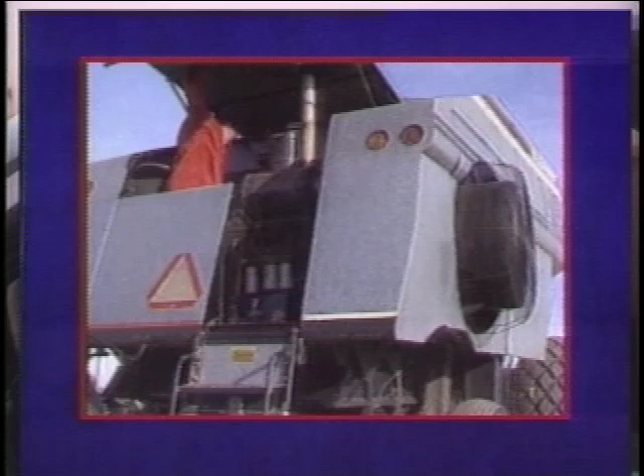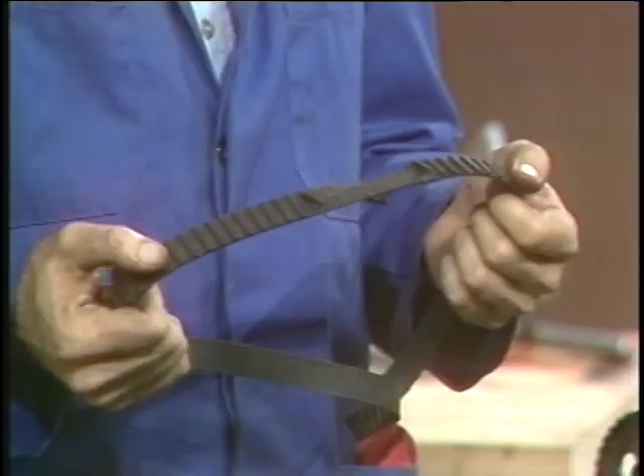On our show today, we're going to talk about timing belts. That's something I've got some experience with. This came off my car and it broke about a week ago. This is the second belt I've broken on this car, so I've got a little background knowledge on this. Cars today, there's 300 or 400 models that use timing belts instead of chains now. You find them mostly on import cars and four-cylinder American cars.

Older cars use timing chains, and we'll give you an example of those. Manufacturers suggest that you change your timing belt between 36 and 60,000 miles, depending on the maker. And it's a good idea to do that, because if you lose a timing belt at highway speed, you've got a big and expensive problem.

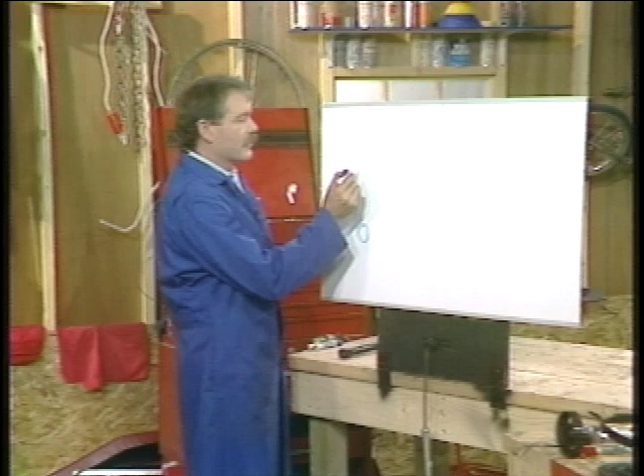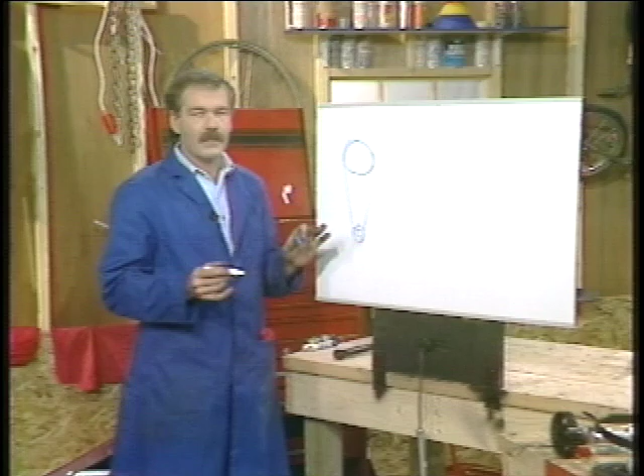Let's go to our tool illustrator and draw a picture of what we used in the old days, or the current big V8s. We'll draw the crankshaft right here in the bottom of an engine and a camshaft up here. A camshaft is the thing that runs your valves. So on the bottom of the crankshaft, we have a chain in older V8 engines that comes up and runs a camshaft gear. A camshaft is a thing that's got a bunch of little lobes on it, and I'll show you one of those in a few minutes.

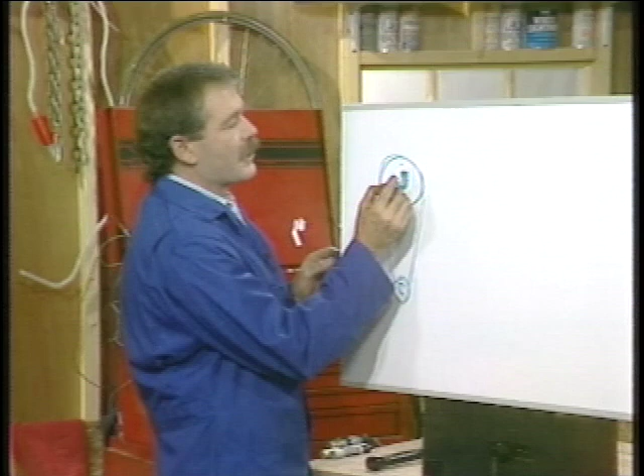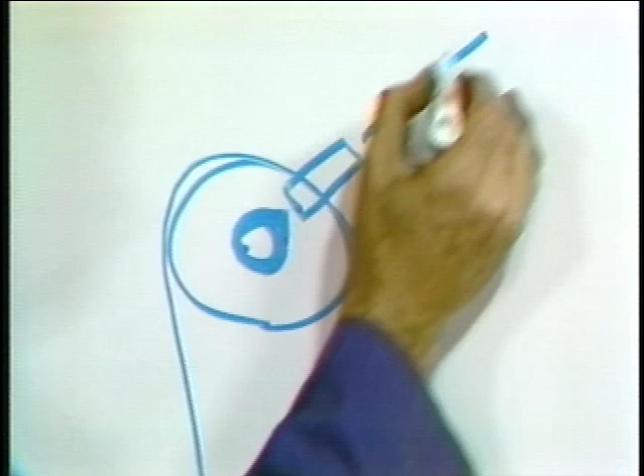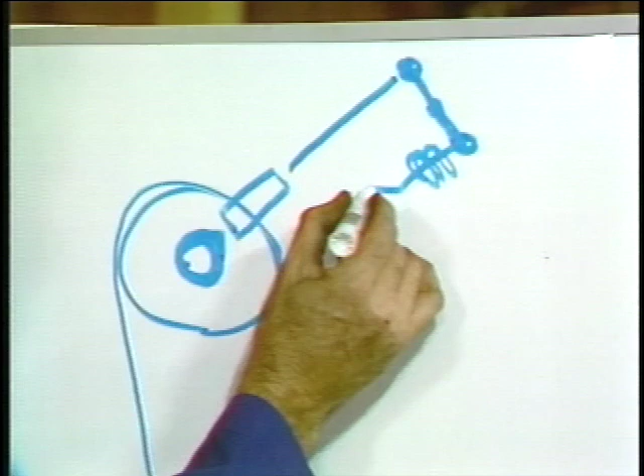As the camshaft turns around and this lobe comes up, it moves a little thing here called a lifter. This is in a V8 engine, you'd have a set here and a set here. The camshaft's located right in the middle of the valley. The little lifter moves another thing called a push rod, and the push rod moves a little thing up here called a rocker, which in turn moves your valve and opens the intake and exhaust valves in your engine at the proper time.

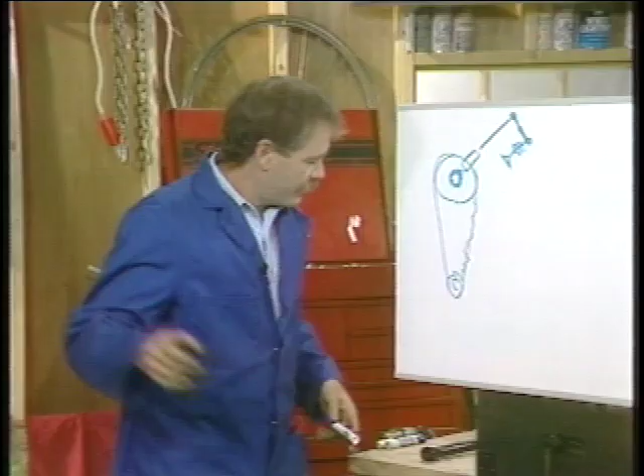Now these chains are very rugged, very indestructible, and did for years. I'll show you one on a 350 we got in the shop here. We've got this old girl here just for demonstration purposes. We'll just take off the balancer. I've got this loosened up, and there's our cover. And there's what an old-fashioned timing chain looks like. And you can see they run on gears.

Now these very, very seldom break. They don't give much trouble, and if they wear down to the point where they get really, really loose, usually the worst that'll happen is that they'll jump a gear. Your engine will go out of time, but usually jumping one gear won't cause a lot of destruction. When they do get old like this, they get very, very noisy, and that's how we know it's time to change them. Let's go back to our tool illustrator.

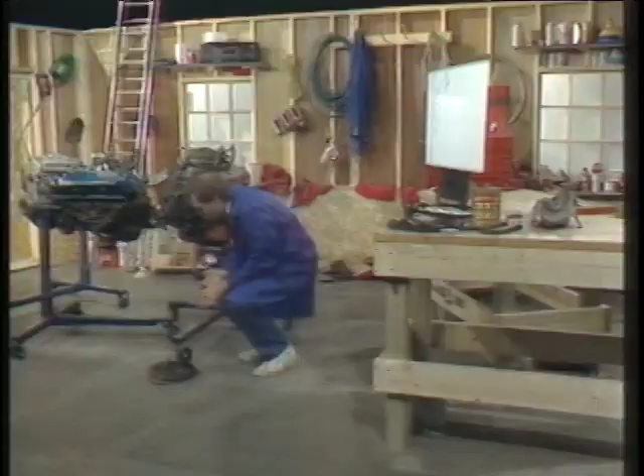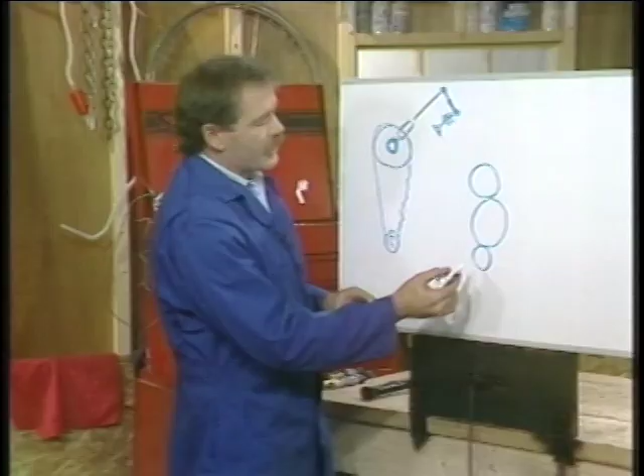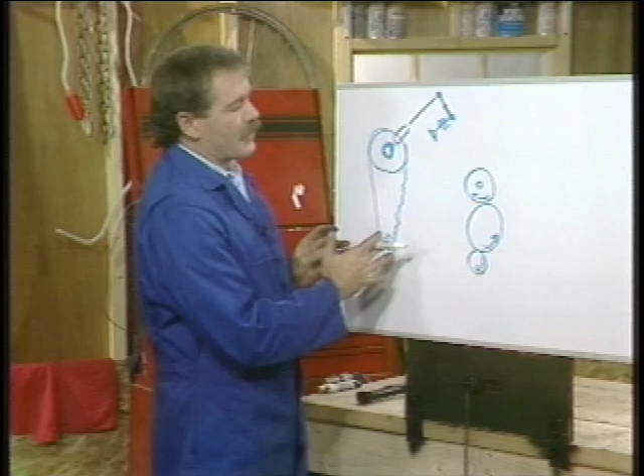In industrial engines, you'll find that they don't use timing chains, they'll use gears. So what we'll do is we'll have a crankshaft here, they'll put another gear on that, and another gear up here. And the reason they do this is that they gear drive this, so as the crankshaft turns that way, it sends this idler gear this way, and this one this way, and your camshaft will be hooked to there. This system operates on the same principle as this, but this is more expensive and more heavy to make. Most big diesel engines have that.

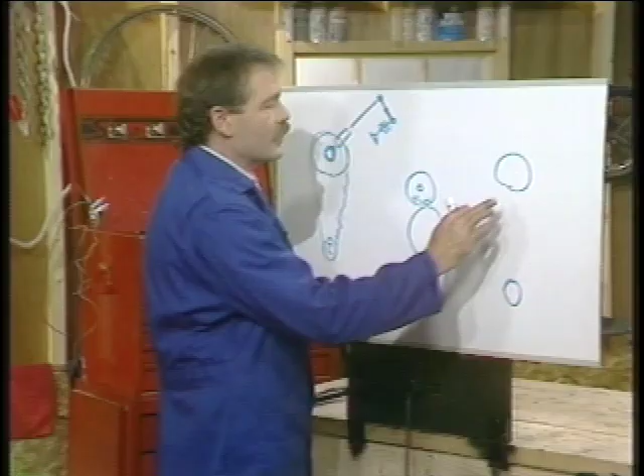So after the evolution of all these things, we got around to the point where manufacturers decided to put the camshafts up top in an engine. And when they do that, that's when we use timing belts. What we're going to look at today is a timing belt that goes up and runs an overhead cam engine.

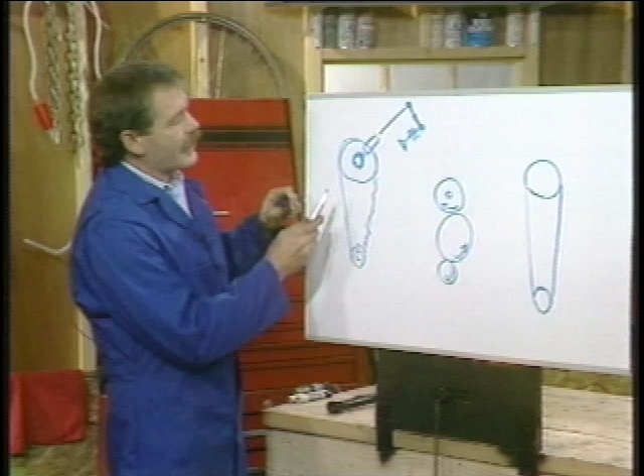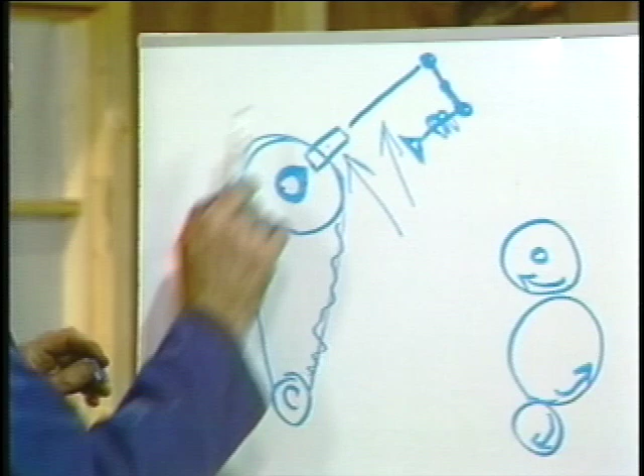Now the advantages of overhead cams are this. We can take the lifter out of the valve train, we can take the push rod out, get rid of these two components, and in a V8, remember, you'll have 16 of these lifters and 16 of these push rods. We can take them out of the system by putting the camshaft directly driven on a belt, and we put our lifter right here to run our valve.

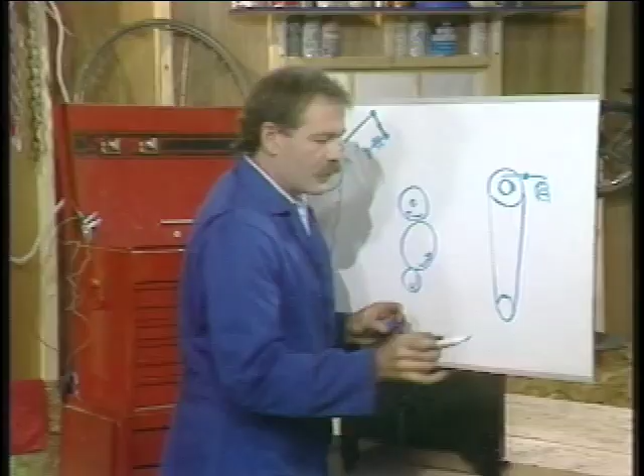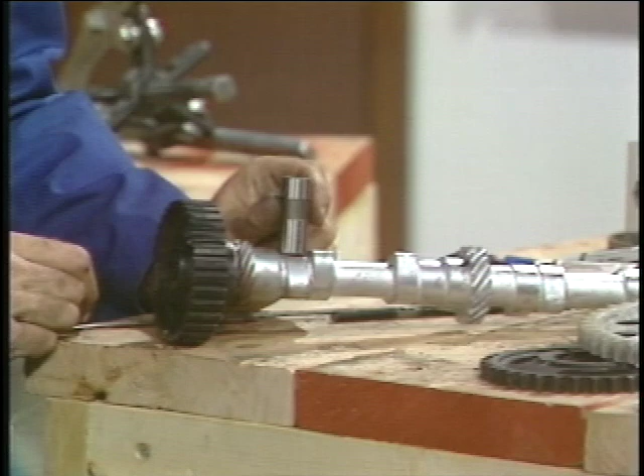Let me show you on the bench here a couple of these components, and you'll get an idea of what we've saved by taking out those parts. This is a little camshaft out of a four-cylinder engine. I'm just going to use it for demonstration purposes to show you. This is a lifter, and in a V8 this will follow and ride right on that lobe, and as the lobe comes up it lifts that lifter.

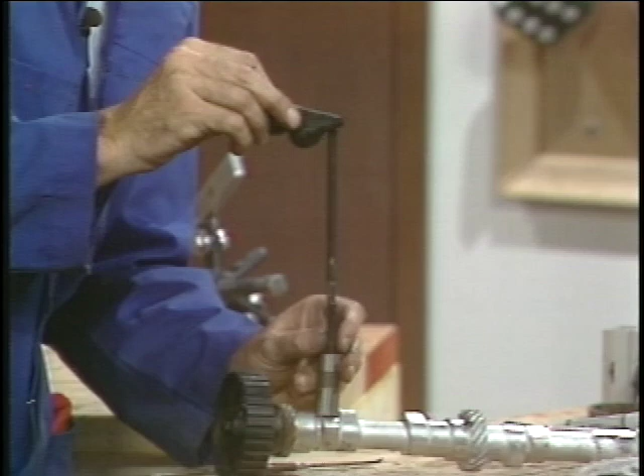The lifter lifts a push rod right there. The push rod rocks the little valve rocker. So this is happening about 3,000 times a minute inside your engine as you're going down the road. By getting rid of all these components, we go directly to a little system that just works right off the lobe and does the valve. We take out a whole lot of friction-making components, a lot of weight, and a lot of wear points.

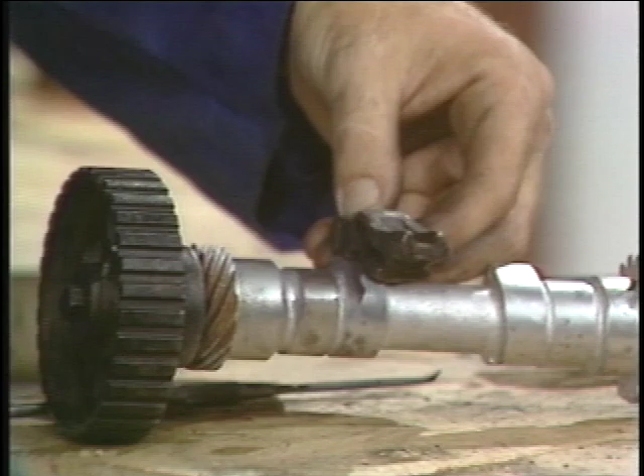The overhead cams in an engine, I've got one over here, a little Ford Pinto. We'll just take that valve cover off. That's what an overhead camshaft looks like. So what we're going to do in today's show is we're going to show you how to go into the front of an engine and change that timing belt.

If you've got a broken timing belt, you're going to have to get specific information to suit your car and how to put it back on. But if you've got a belt that's still in place that you're inspecting and checking to see how bad it is, we'll show you how you can change that without a whole lot of fancy or special tools.

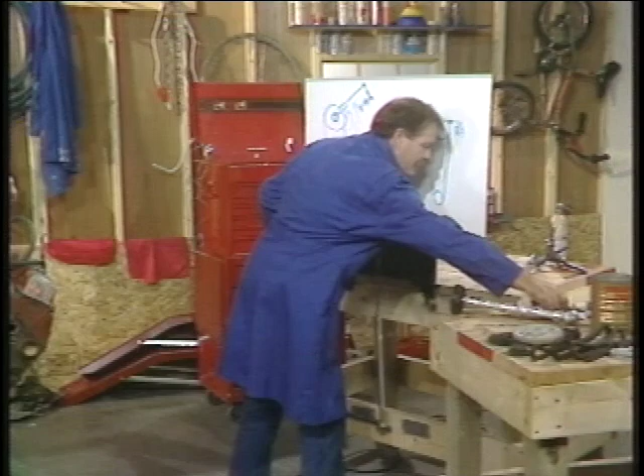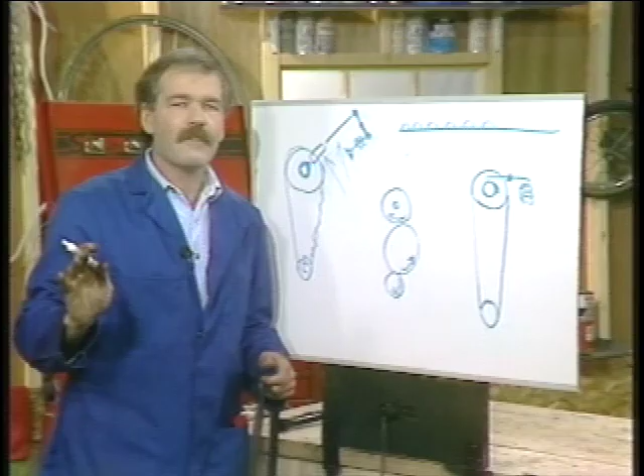Now, one thing about timing belts. I showed you mine. There's a couple things we want to watch for. There's 2 or 3 different styles of timing belts. Basically, the differences are in the teeth. We've got some that have got a little round tooth like this, and they've got fancy names. I think this is called a curvilinear or something. You have to be careful when you buy a timing belt that you check that it's the correct belt to go in your car. There's one that has little square teeth like this, and this is called something like a trapezoidal or similar, something along that line.

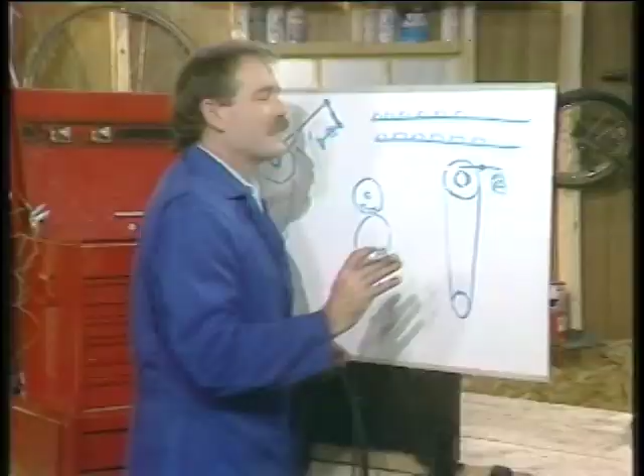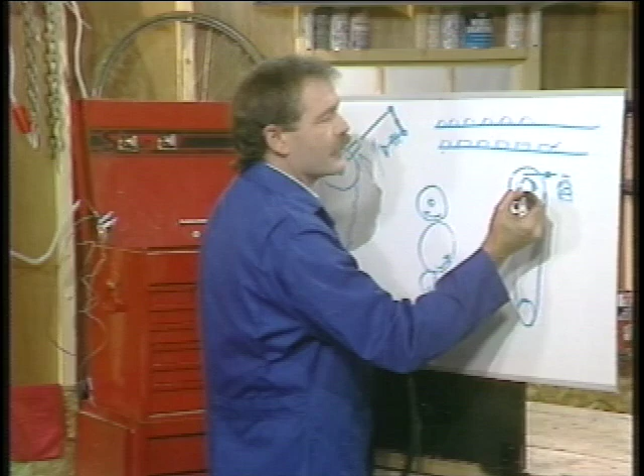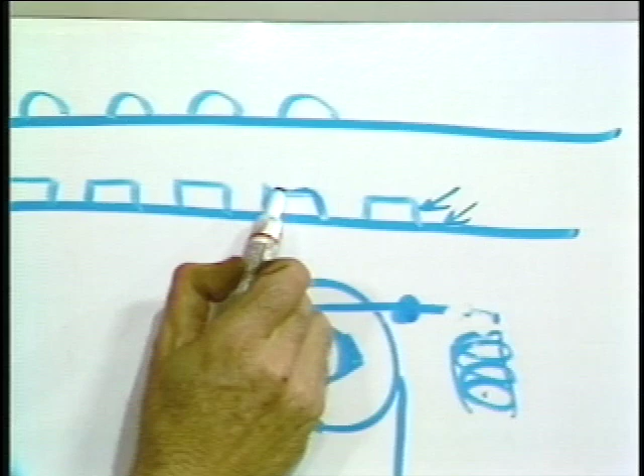But you've got to be sure that when you take a belt off your car, the new one you get matches the one you're going to put back on. The place to look in a timing belt for wear is on the edges of these teeth and down in here. You may see a little bit of material lifting, or you may see these teeth starting to lift. Watch for any wear, or if you've got a rounded edge on part of your teeth, it's time to replace that belt. The other thing you have to remember is that timing belts are very sensitive.

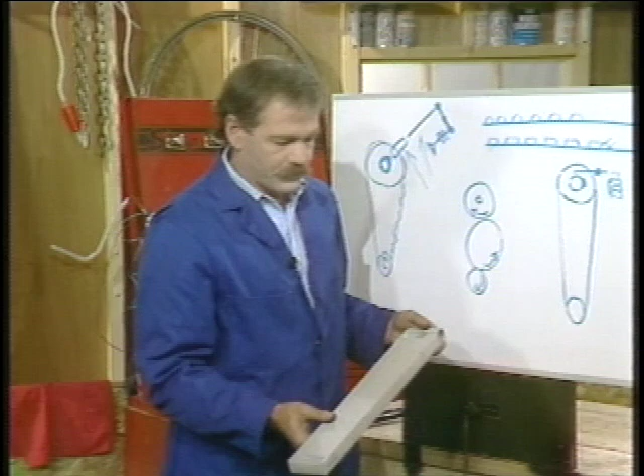When you handle them or buy a timing belt, it'll almost always be in a box. The reason for that is they don't want these timing belts bent at anything close or a tight angle, because if you do, you can crack the backing in them and the belt won't hold much. A timing belt, as it is, will probably hold 1,000 pounds. If you crack it and break it backwards, it'll probably break at around 150 pounds pressure.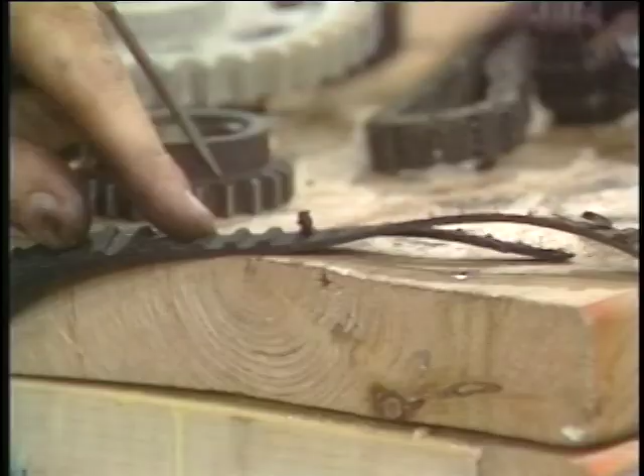Just take a look at this one here. I'll just set it on the edge of the bench and show you what happened to mine. This happened when my car was sitting still at a service station. When I went to start it, it stripped off this amount of teeth. You can see that those teeth were lifting off, and that timing belt shot. If I would have checked that, I would have caught that in time, and I would have saved myself a tow job and having to take that thing apart with the car dead. So that's why it's important to inspect your belt.

What we're going to do today is look at 2 different engines. We've got a Ford Pinto engine. We're going to take it apart and just show you how the belt runs in that, and we've got one import engine. We'll do that when we come back.

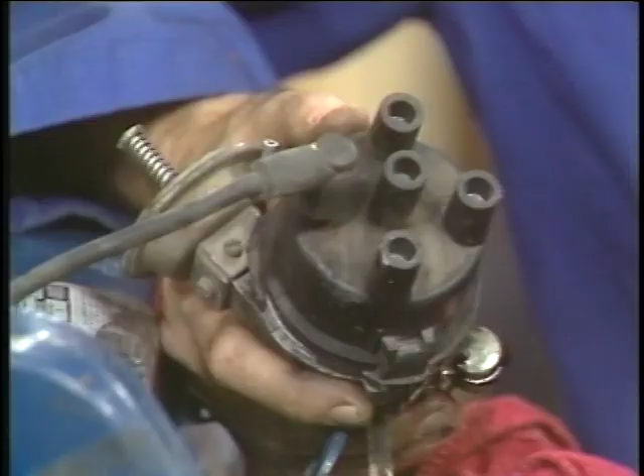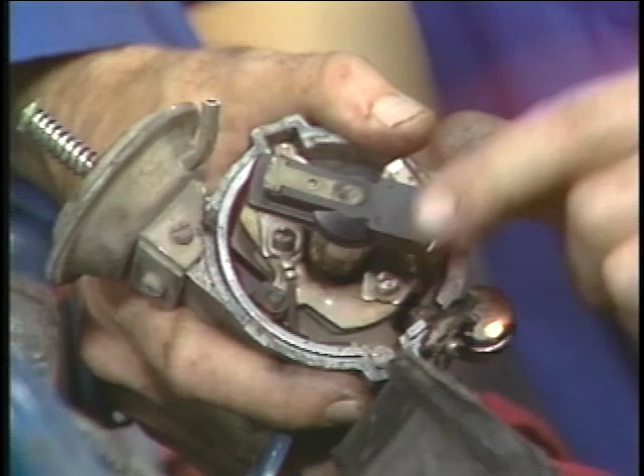If you've got a crossways mounted engine, it'll be the one on the fan or on the end where your pulleys and your timing cover runs will be number 1. So trace the wire to number 1, find that, then take your cap off and turn your distributor, or turn your engine over until your rotor points to number 1. That'll mean that you're firing number 1 cylinder and you should be close to top dead center.

The second thing that we do is go down to the marks on our front pulley, because we've usually got a timing mark in an engine.

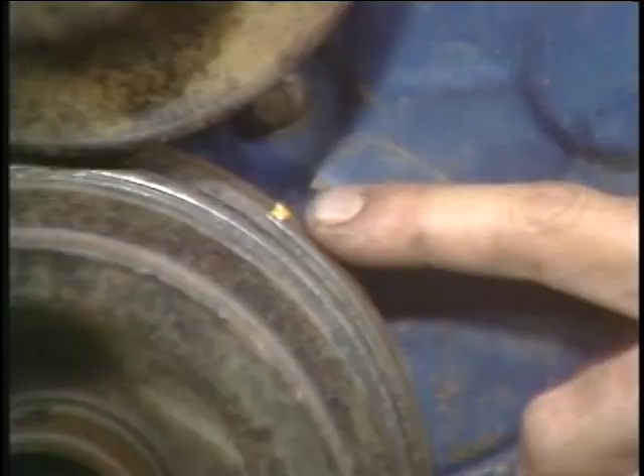You can look right in here. I've marked that with a yellow crayon so you can see it, and there's a little pointer there, so you can make your fine adjustment. When you've got that right on top, dead center, number 1, and your rotor pointing to number 1, disconnect your battery. Don't let anybody turn that engine over till this job's completed.

Now let's get down here and down and dirty and do some work. The first thing we've got to do is remove a lot of the hardware. You may find motor mounts and so on that are interfering in this job. This is going to be really nice because I got it on the bench.

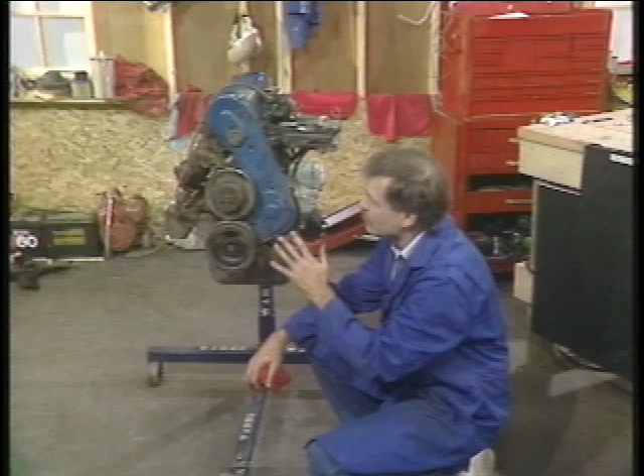This is our water pump pulley. We'll just get rid of it, take it off. You're going to have to use a gear puller to pull the front pulley off an engine.

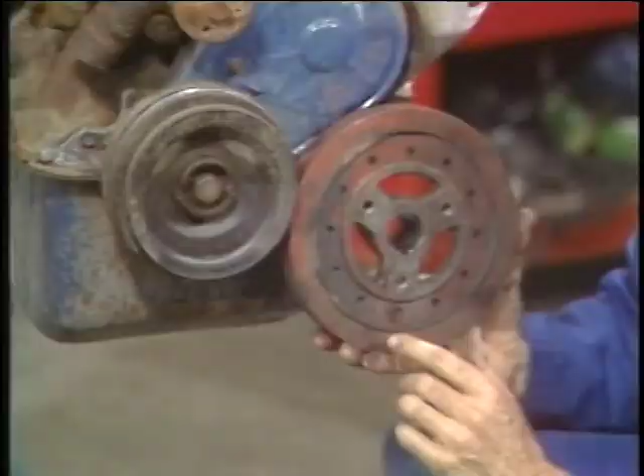I want to point out one thing to you right here. I've got the old pulley off the front of the 350 Chev that we keep around here. This is a vibration damper. You can see that it's got a ring of rubber in it, and you cannot pull this type of pulley with an outside puller because you'll damage this rubber mounting. This is put into the engine to take out harmonic vibrations that can cause a crankshaft to break. Most of the smaller engines don't use that, and this is just a simple little pulley.

You'll need a 3-jawed puller like this, which basically will go on and yank that off for you. I've got this one all loosened up, so we're just going to take it apart the easy way. I'll just wiggle and jiggle this off. Well, that's the theory. All right, it's off.

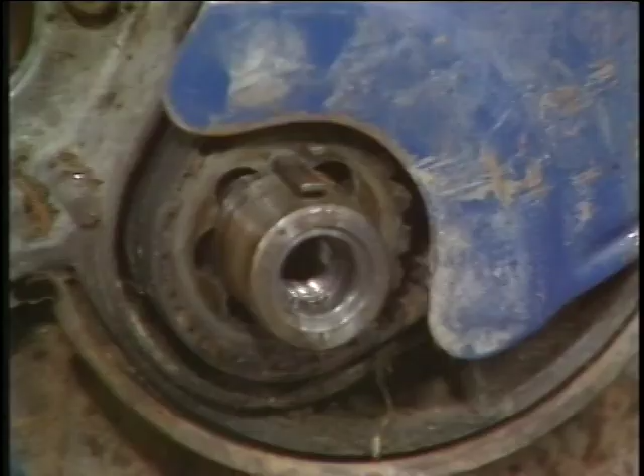Be very careful, there's a little key right there. You'll see on the crankshaft, and that's usually straight up or straight down at top dead center. That kind of gives you a second indication you're okay. Don't lose that key, especially if you've got an import car, because it's going to be metric and hard to find.

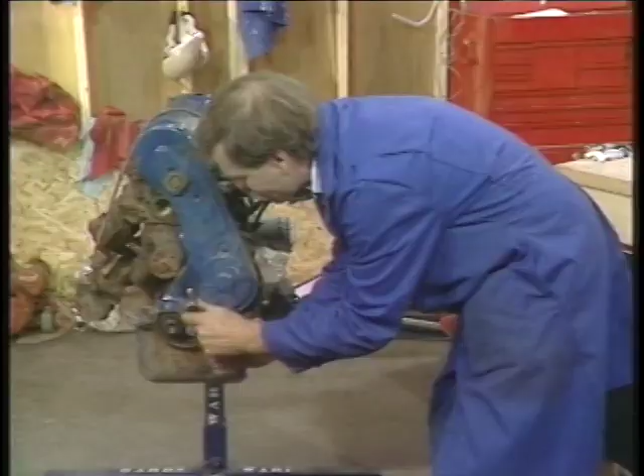This is our timing belt cover. Let's take it off. I got to find some tools here. These are combination metric, and some are standard, some are metric. I've got these loosened up because I didn't want to take all day to get this off. Just run these off. We'll get in and have a look at our timing belt.

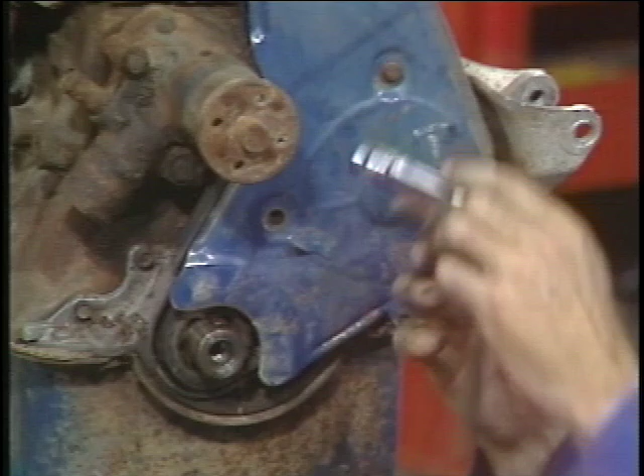Most of these covers are not sealed units, as you can see a little bit of the belt down here. They're not sealed, but they do have dust seals in them. I'll drop that down there, we won't need that for a while.

If any oil comes out when you take something like this off, you've got a real serious problem. Take the bolts out. Okay, we're just going to slide that cover off. And there's our timing belt, just exactly like I drew it for you.

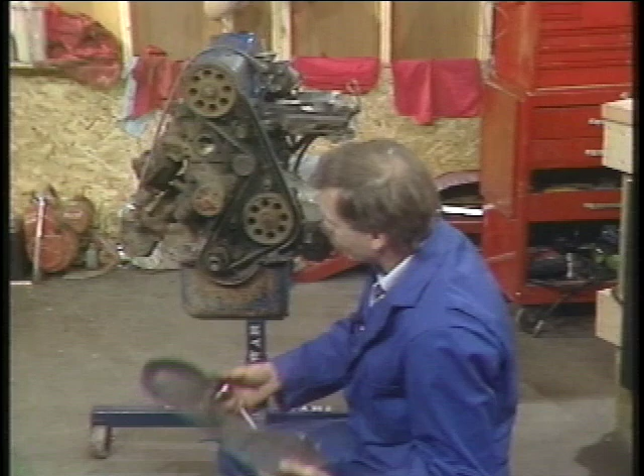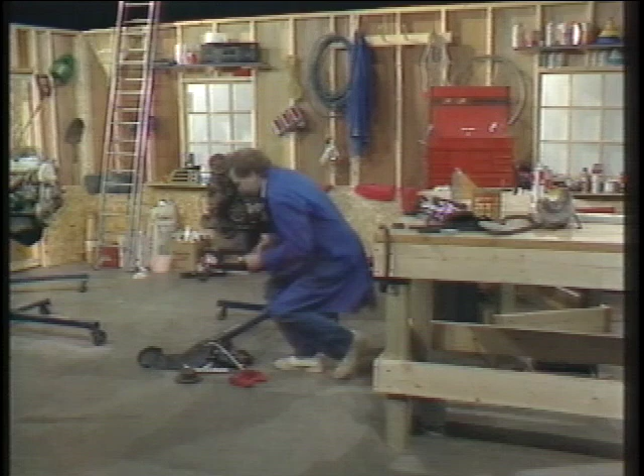Well, pretty well anyway, there's our timing belt. We can inspect the condition of this belt from here. Now, because we don't have a broken belt, and we've got our crankshaft on top dead center, look for a timing mark up here. I got to get a pointer here and a crayon. Now, if you're going to do this job on your car, you may need specific information, especially if it's been broken. But otherwise, here's the little pointer right here on this Ford Pinto. There's a little dot on this tooth right here, and a little marker there.

Now, when we have this belt off, or loosened off, what we have to be very, very sure of is that the relative position of the crankshaft and the camshaft stay the same. Otherwise, when we put it back together again, it'll be out of time and can do some serious valve damage.

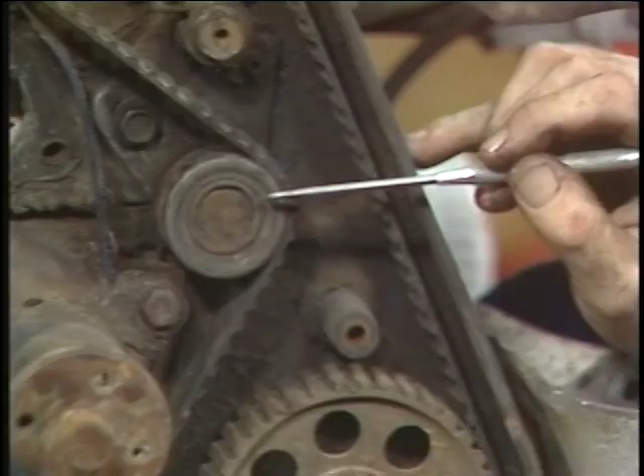This is the tightener. And most cars, or most of the types that I know of, have a spring-loaded tensioner in here that tensions the timing belt, keeps pressure on there. We'll show you how to loosen that off on this car, and you've got to check it out when you do a timing belt job.

Let me set those down. I need some more tools here. Got some in my pocket, some here, some there.

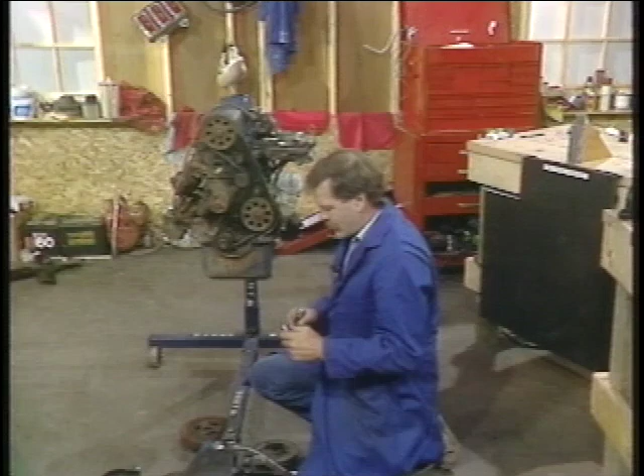Okay, the tightener on this engine has got a little bolt right in here, a 1/2 inch. We're going to loosen that off, and that secures the tightener. We'll just slack that off for the moment, and that will allow that little tightener to move for us. We got one bigger bolt up top here on the adjuster, right there. We're going to loosen that off, and then I'll show you how that thing flexes.

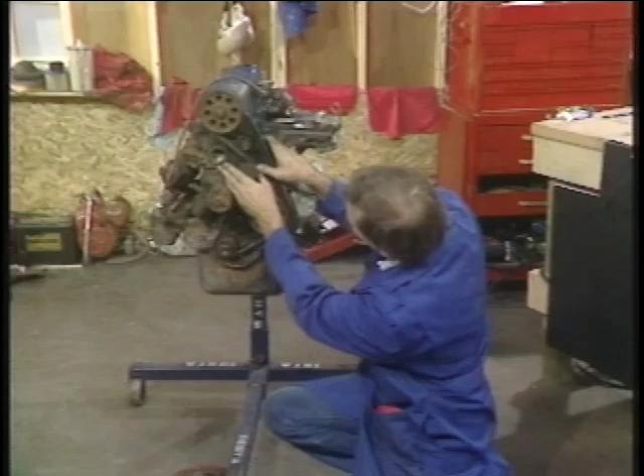All right, now our adjuster is loose, and if I can get my thumbs in there, I'll show you how that moves to keep tension on the belt. See that?

Now what we have to do is hold this tensioner back out of the way while we take this belt off, because it's spring-loaded. When you're doing this job, you want to go in and check the bearing in the little tensioner roller, because if it's gone bad, you'll be getting a lot of noise. Now I got to get in here if I can, and what I'm going to try to do is take some tension off this tensioner, and I'm going to slip that timing belt off and take a look at it.

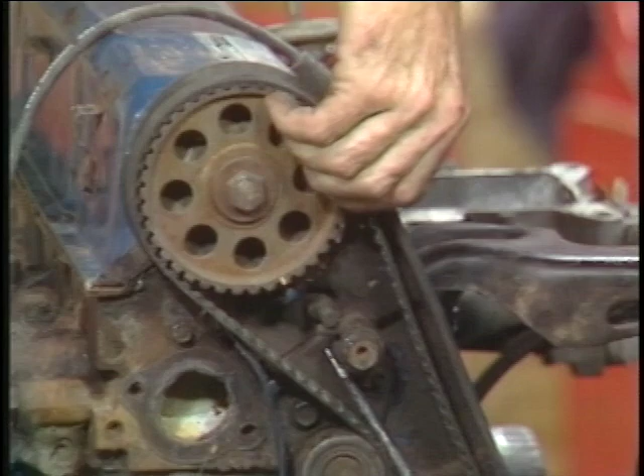Okay, so we're loose there. Slip the timing belt off the side. Easier said than done, Bob. There, they're coming. There, we've got our timing belt loose.

Now we can inspect it the way I told you before on the board. The things to look for are problems in the teeth. If you're ever going to reuse a timing belt, you want to mark it for direction of travel. That's very critical, it should travel in the same direction as when you took it off. But for the cost of a belt, you're better to replace it every time.

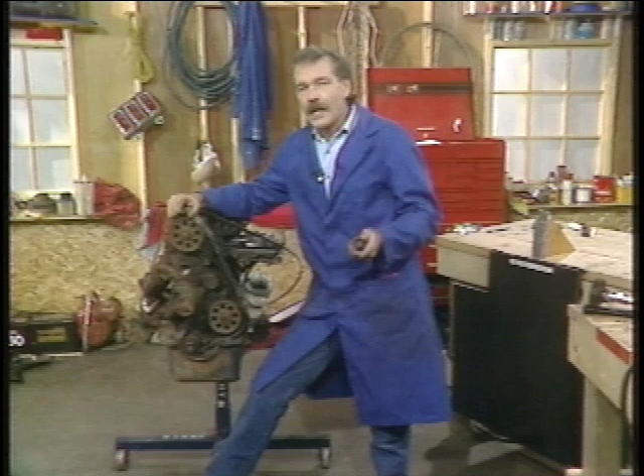To put it back together, we just have to be sure our camshaft doesn't move. Route it the same way that we had it, and get it around behind this tensioner.

To put it back together, get your belt rolled up over. Make sure, as I say, be careful with this belt, try not to damage it in any way you can. Get your belt locked in your grooves and make sure the distance on the straight side of the belt is snug right there. And that sets up your timing, having this gear matching this.

You've got to pull it around behind, get it around behind that adjuster, and the spring tension that's on that adjuster is proper for this engine.

We'll finish this up when we come back.

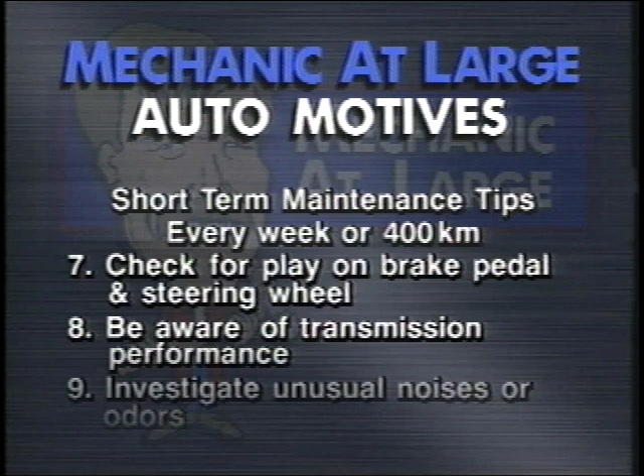Welcome back. I got a bit of a fly problem here today. Okay, our little Pinto engine.

While we were gone, I got it all into line, got all my notches lined up, and like I say, the critical thing is to make sure that nothing moves when you reassemble it. It's back together. That tensioner on the Pinto is automatic, so all you have to do is leave it loose, it'll take up the tension on the belt, and then snug up those two bolts to anchor it.

Let's kick the old Pinto out of the way and bring up this little import engine. This is off a little Honda.

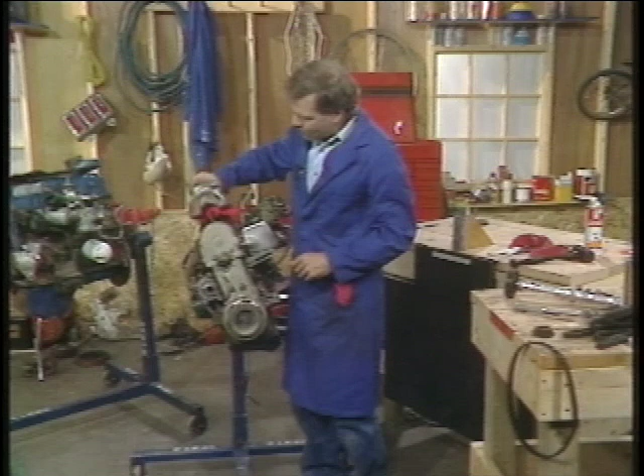We've got to take the valve cover off to do this job, so that's easily done around here. Throw that down there, and we've got to remove all this little cowling and cover. Remember again to start with, set your engine on top dead center, number 1, use your rotor to find it, and on the Honda we've got a little timing mark down here in the front cover.

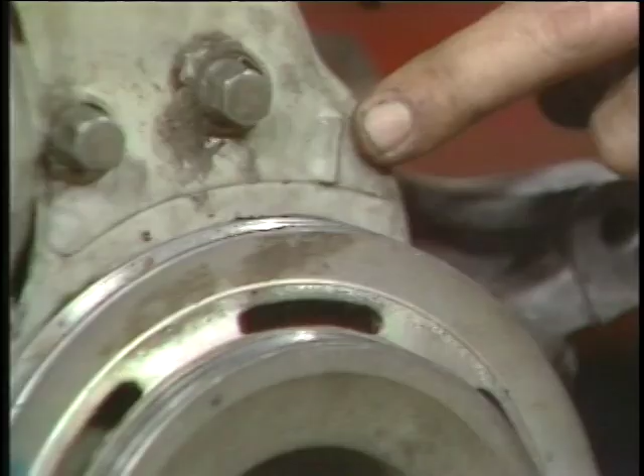Now I'm going to take the pulley off, just as easy as I did on the Pinto. We've got these pre-loosened off, I actually did it myself. Remember again the little key that I mentioned to you, do not lose a metric key if you can help it, or you'll be back at the dealership looking for it.

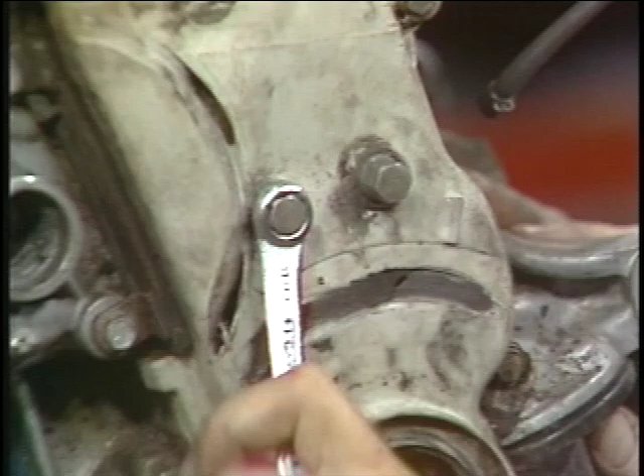Now I want to show you one unique thing on the Honda, and you may have this on a different make of car as well. The Honda has got an external adjustment for the tension on your belt, and that's these two bolts right here. So to reset the tension, if your belt's getting worn, all you have to do is loosen these two bolts off. That allows the tensioner to move over. It's spring-loaded, and it puts the proper tension on that belt, and it's adjusted.

If you're going to get down to doing this for yourself, buy the book or the tape on how to do it so you'll know exactly what you're doing, but you can adjust this externally.

We're going to take off this cover. You can see that this cover's in bad shape. This engine was overheated by a fellow who lost his water pump right there, and he kept on driving it until it quit. But on Mechanic at Large, we like to recycle, so we're using used engines.

We got a bunch of little bolts around here. These are metric, around 10 millimeters, I think. You find that so many cars these days got half metric, half standard, and it's very confusing. Good for the tool makers.

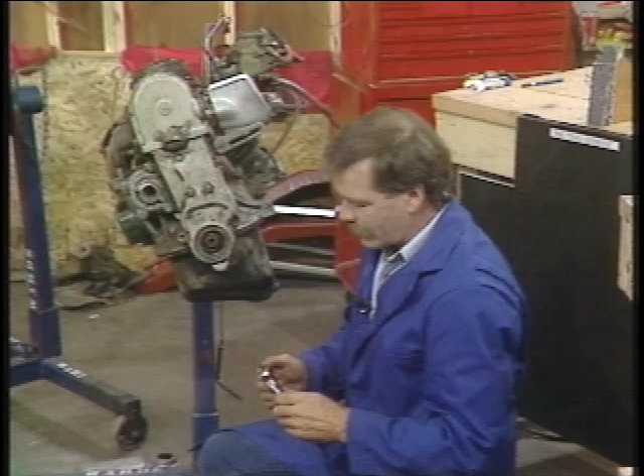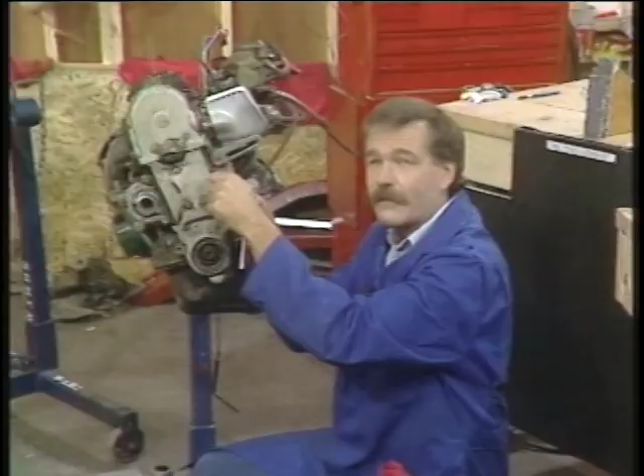Another one up here. You'll have to take your water pump pulley off before you do this job, and probably some other sheet metal. I believe on the Honda Civic as well, you'll have to remove the front tire. So check your book on that and make sure you feel comfortable doing this job.

One more there. Got a lot of bolts in here. I usually use impact tools to do this, but they're too noisy to use, and you probably haven't got them at home, so we'll do it the way you're going to do it. Two more bolts up there. Good thing I loosened these. All right, there comes that cover off.

I'll set it aside. There's our top little gear, and look at this timing belt. Now this is the kind you really like to find, because when you find something that's wrecked like this, you know you've saved a very expensive repair.

There's our two little adjuster bolts. Let's pull this off, and look at the mess in here. This is the timing belt, and it's gone to pieces. Isn't that something?

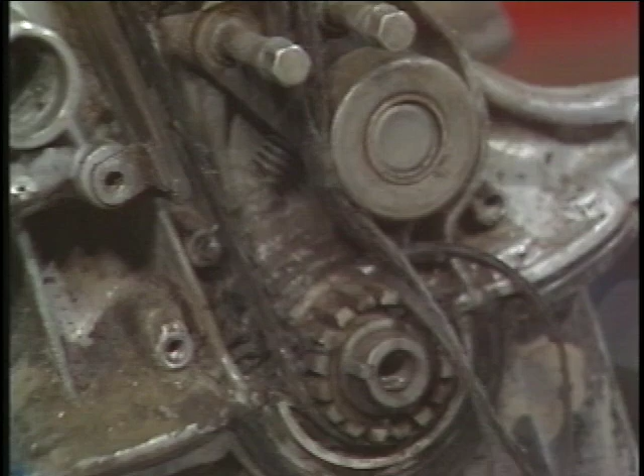There's the little adjuster I mentioned. Here's how it works. You can see when it's loose, it's movable. It's got spring tension on it as well. So when you're outside, you can readjust this by loosening these bolts. That'll let the little idler move in to make up for any wear in the belt, and then you simply tighten them up again. Let's take this belt off.

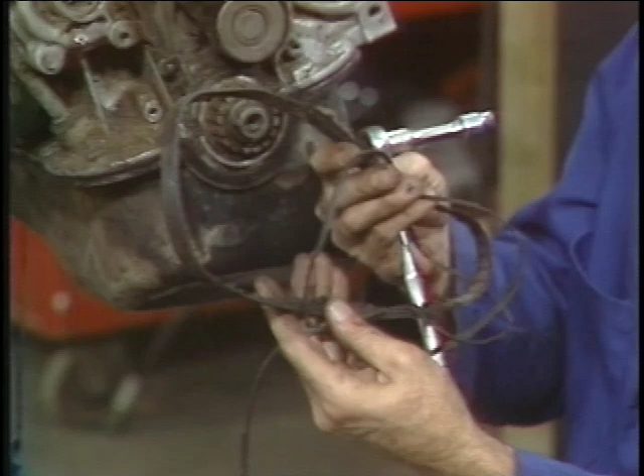I've got a new one here. If we can get it off. This guy was very, very close to a major failure with that belt. That engine's been so badly overheated, this belt's about melted.

The other thing to check before you put a new belt on is the condition of your top, upper, and lower gears. What you want to look for is any sharp place or any roundedness or dishing, because if these start to wear out, if you travel a lot in dusty conditions, they'll wear little ditches in them, and your belt life expectancy will go way down. What you're looking at here is just rubber, you can see.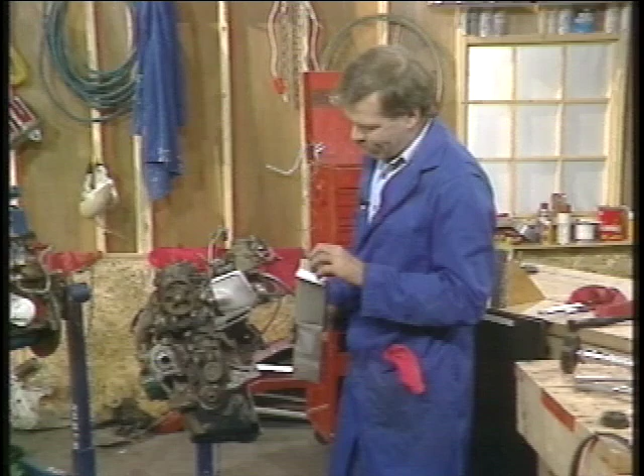Now remember, be very, very careful with this belt. You don't want to be too rough on it. I want to handle it very gently because it's very fragile and very expensive. Now what we have to do is loosen that idler off again to get that belt on.

And I want to point out one other thing on this engine. The timing marks on this gear up top are very faint, but on the Honda, the timing marks align crossways. There's one on each side of that little gear. So when you set this one, this wheel will be right across.

Now, as I mentioned before, you want to disconnect your battery or your starter on these cars so you can never turn over the crankshaft. The camshaft, once you take the belt off, may have a tendency to flip forward or backward on you. That's because the valve springs don't want the camshaft to be where you want it to be. When you put this belt back on, you've got your crankshaft set at top dead center.

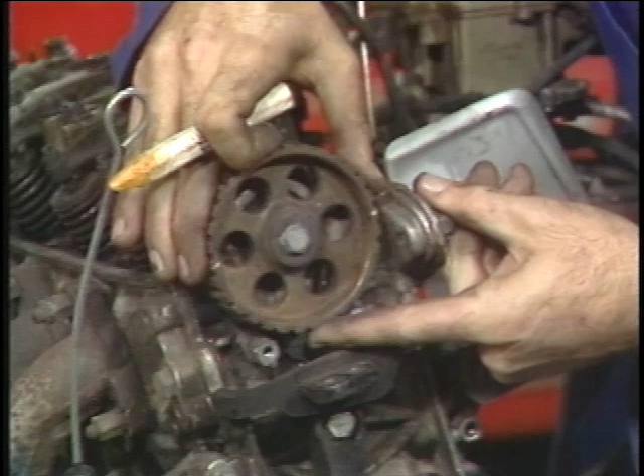If this gear moves on you at all, like that, or doesn't want to stay where you want to put it, you may have to put a screwdriver or pry bar into the hole to move it ever so slightly when you put your belt back on. That's easy to do, but remember it's critical, and it's very easy to get one notch out.

There's my new belt, I'm going to put this on. Again, check your idlers, put your belt on, let your tensioner come snug against your belt, and then tighten up your two bolts. That's how you do a Honda.

I'm going to put this back together today after we leave, but this is our show on timing belts. I hope you'll pay attention and get yours checked.

If you've got over 30, 40,000 miles, if you don't feel you can do this, take it to a garage and have it done. You can have a very major failure on the highway, because if that belt breaks about halfway through the engine cycle, your valves will collide with the tops of your pistons. You'll get a noise about like this,